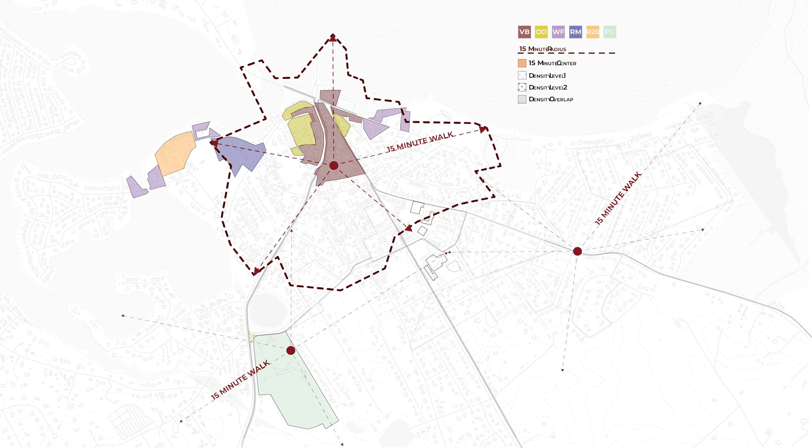Sag Harbor is a secure community, making it ideal for prioritizing walkability among residents and connecting the residents with the village business district. Accessory dwelling units are permissible in the R20 district and can be allowed in the village business district with special exceptions.

Many people from outside the village boundary use Main Street as a pass-through without experiencing it from a local lens. Introducing street closures will reduce the traffic during the peak season, and it will promote integration of the local and tourist population.

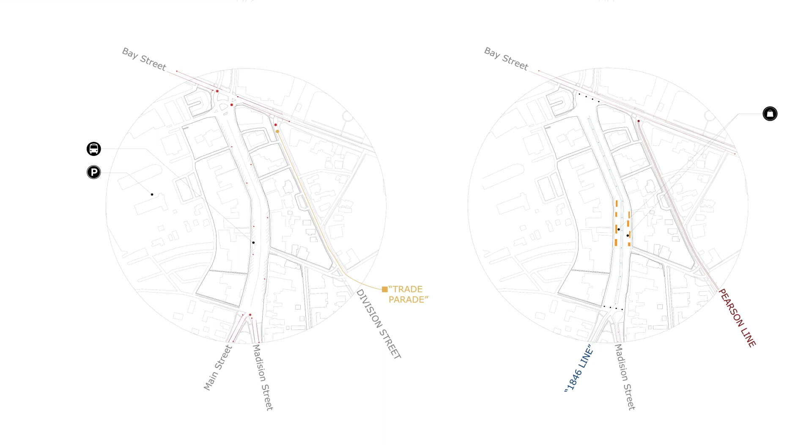The proposal consists of 4 phases centered around prioritizing pedestrians and culture, while simultaneously increasing the density and affordability of the area. It is a progressive implementation of street markings and closures with an overlap of additional programs and housing targeted towards the workforce population.

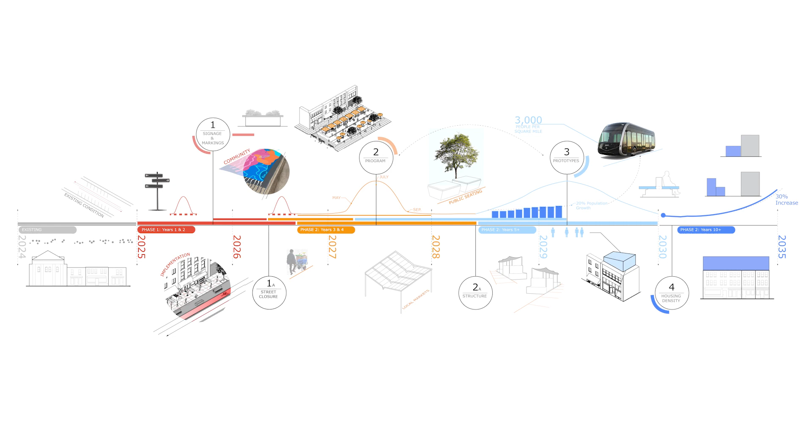Using various open street concepts and proven techniques, such as a shift from parking lanes to bike lanes, gives valuable space back to the people.

Street closure and temporary structures provide a new layer of program which have lasting impacts on the culture of Sag Harbor and helps to reimagine its main streets.

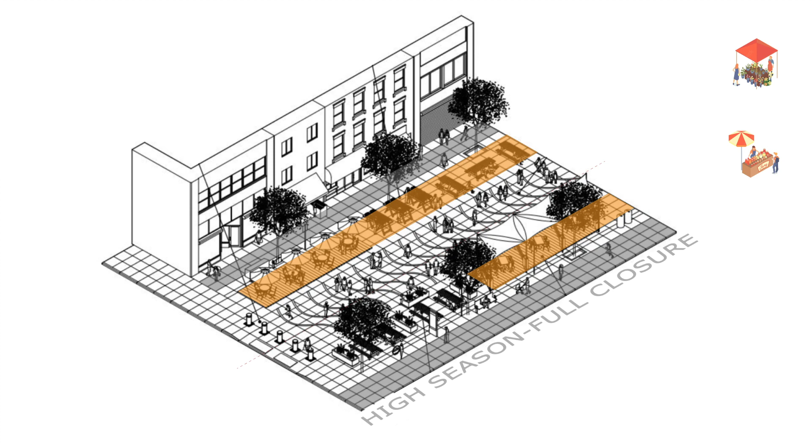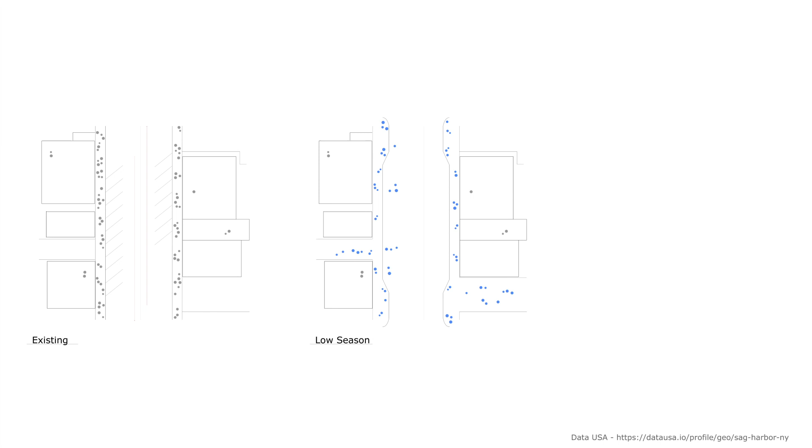The density of people on the streets and in housing units undergoes dynamic changes from its current state. In the low season, there is an increased density of people which remains on the sidewalks, and in the high season, it expands into the streetscape.

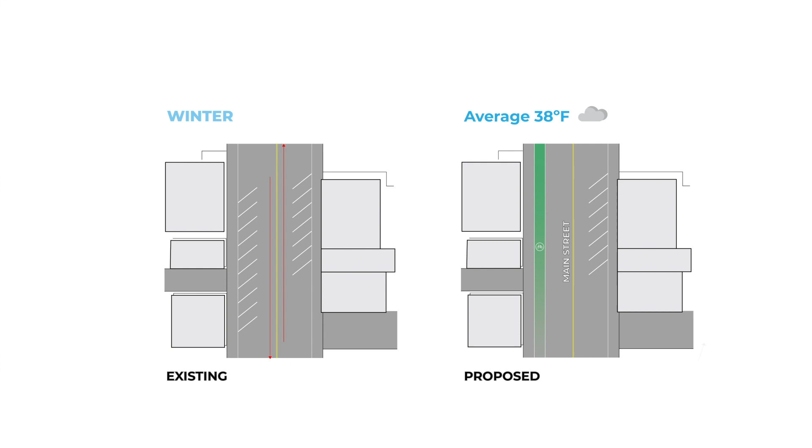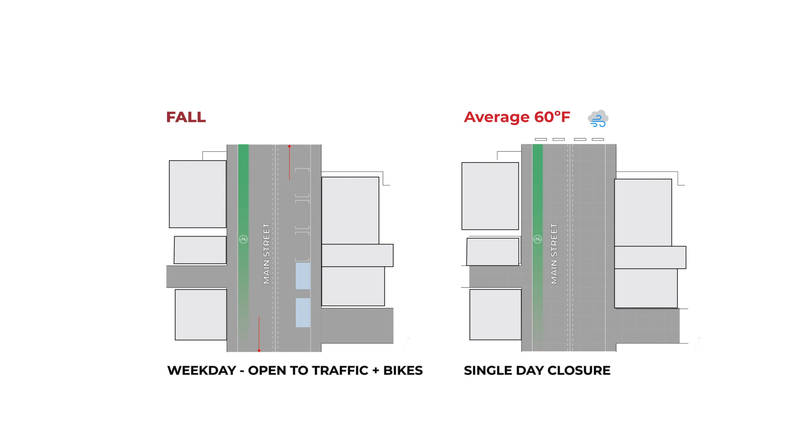The experience of Sag Harbor will be adaptable. In the winter, there will only be single-lane access to Main Street. In the spring, access through the street will vary based on weekday or weekend settings. The fall will offer similar opportunities and experience new events on the street. During the peak season, full street closures will be implemented as the largest change to the streetscape.

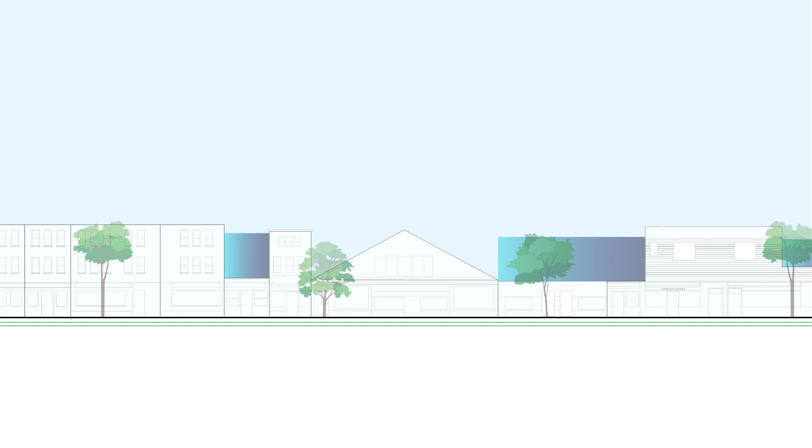The existing historic Main Street exudes charm with its timeless architecture and quaint storefronts, while the proposed extensions of the shops on Main Street aim to seamlessly integrate modern housing and enhance the overall density. The units will vary in size to appeal to different demographic groups and alleviate congestion in the village.

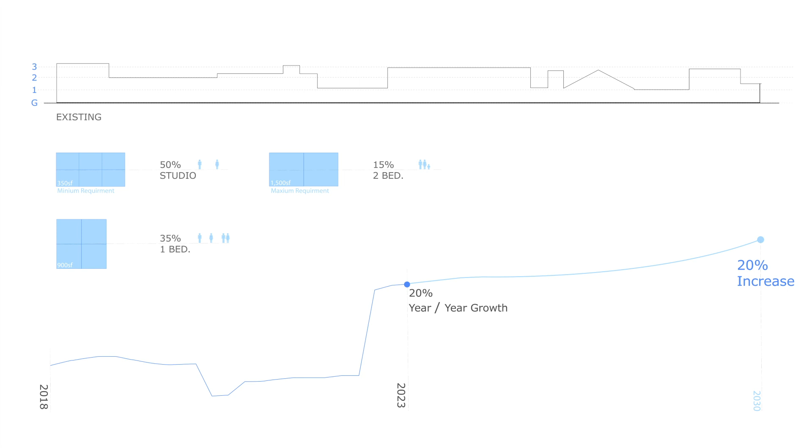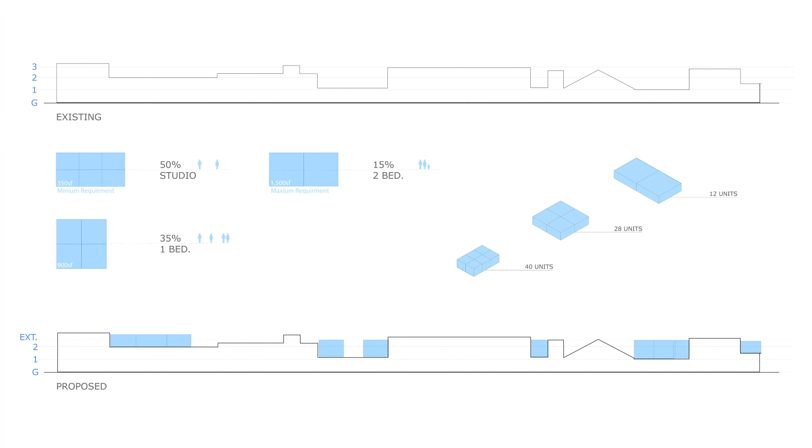Sag Harbor experienced a 20% population growth from 2018 through 2023. With the introduction of housing extensions, the goal of the final phase provides a solution to this trend in increasing population density. This will be accomplished through various types of housing units to fit the needs of students, families, and the local workforce by 2030.

Shared or communal housing options provide versatile solutions that cater to the local workforce, fostering a collaborative and cost-effective living environment that promotes a sense of community. More private units are available for families localized within Sag Harbor's Village Business District.

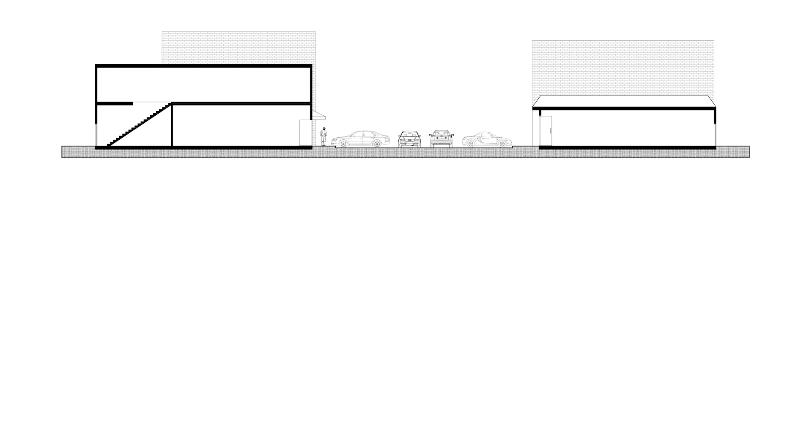Phase 2, 3, and 4 will experience overlapping conditions, including housing development and changes to the street. The success of the phasing will be determined by the dual factors of sustained population growth and the compelling desire for individuals to experience a revitalization on Main Street.

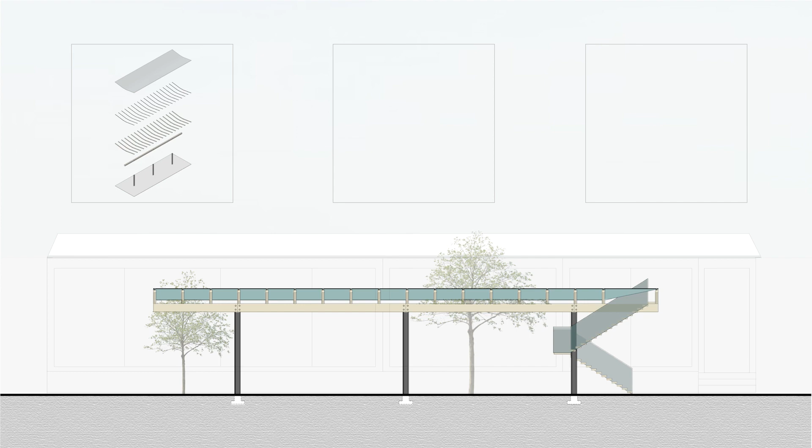Along certain points of Main Street, an operable canopy system will be constructed to define the new program needs. The space will provide structure and shading to the activities below, which will include markets, extensions of shops, and other leisurely activities. The canopy will be introduced with structural footings and slowly transform into a semi-permanent structural system with operable panels which retract or extend to meet the seasonal needs.

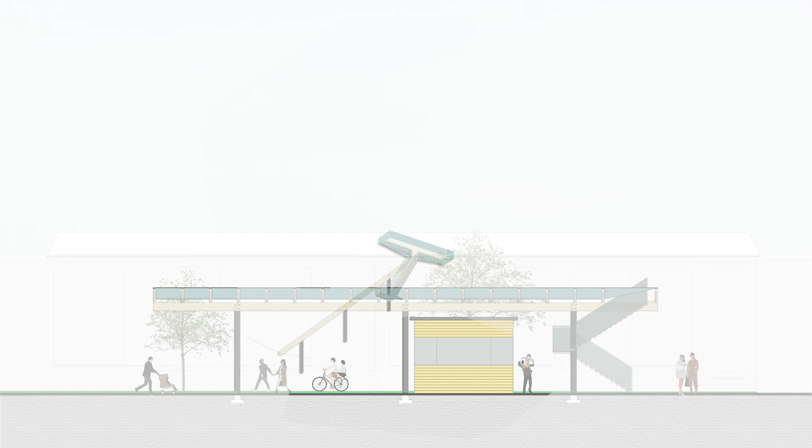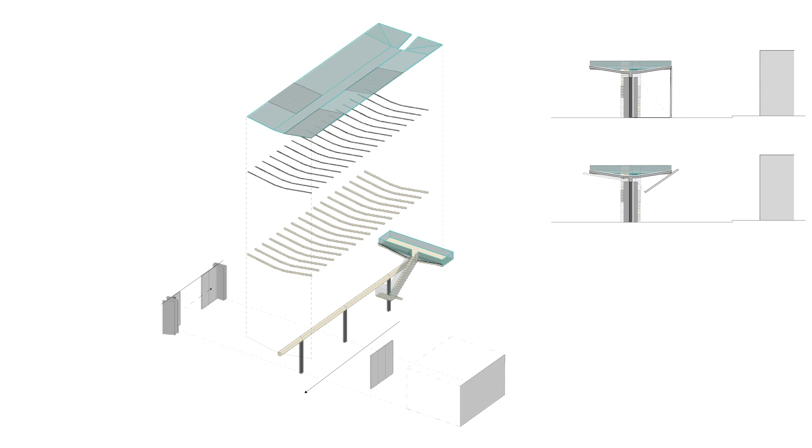The vertical structure will consist of steel columns connected by timber beams with a series of supporting members to hold the glazing above. Horizontal tracks will allow the glazing to slide back and forth, creating different possibilities on the street below. A viewing deck has also been implemented to experience the historic harbor and new extensions, creating Sag Harbor's identity.

This revitalization on Main Street will be the result of a gradual increase of population on the street and the priority given to the people, program, and activity.

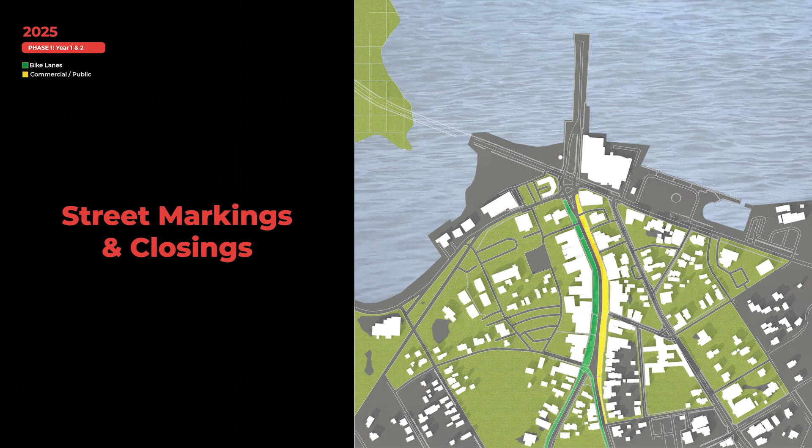In efforts to mitigate traffic and overall congestion, limiting automotive access through street closure allows for economic and communal opportunities.

The project plan aims to reintroduce a sense of density which Sag Harbor once experienced through an infill process that utilizes and extends existing one-story buildings along Main Street.

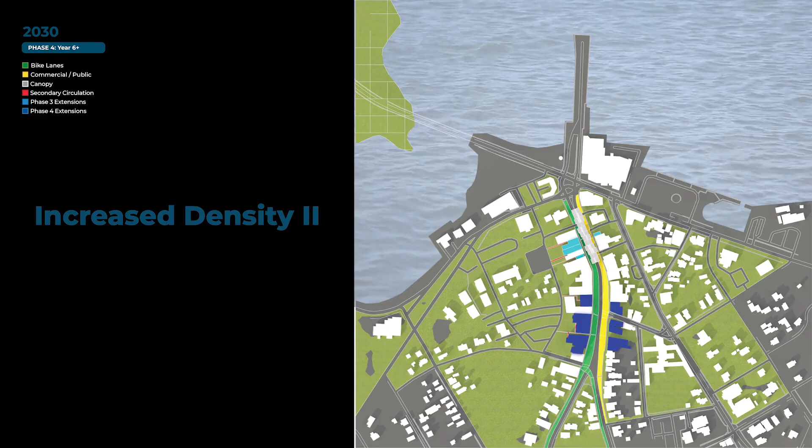In 2025, bike paths are the first markings on the street, creating a new means of transportation and access to Main Street. Valuable street space will then be given back to the community and local businesses as an incentive for offering workforce housing above existing storefronts. The first extension will operate as the prototype for future developments to come by the end of 2030.

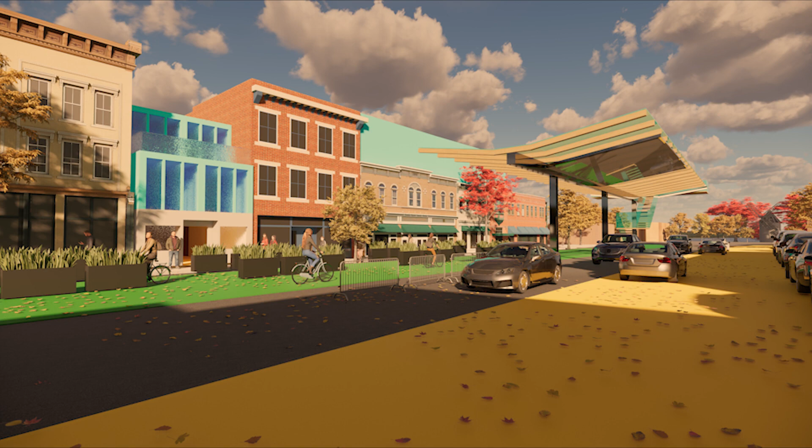In the years to come, seasonality will affect how the open street operates. In the winter, there will be less density on the street with full automotive access. As the peak season begins, pedestrian and community engagement is prioritized.